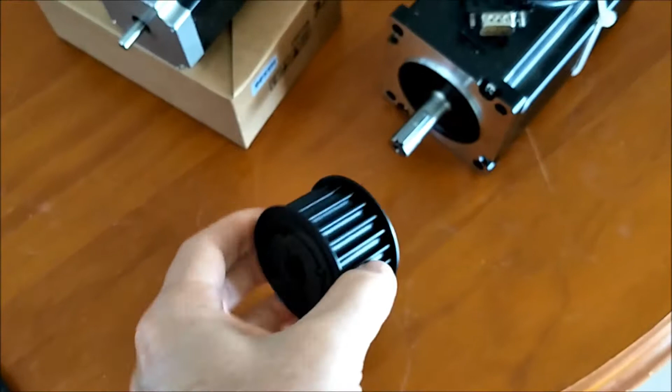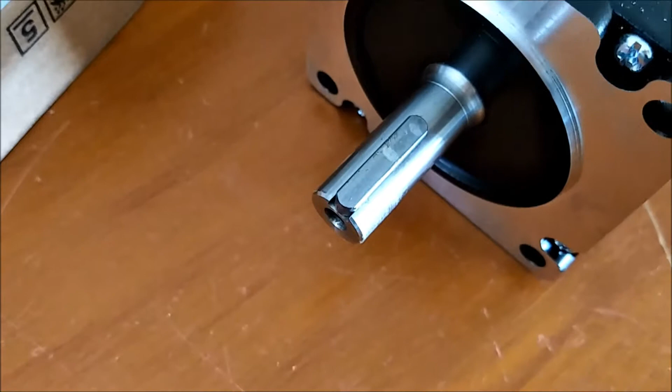Now to this pulley, which I was trying to work out whether I was going to put on that way or that way. The keyway, as you can see there, they supplied it with a key in the keyway. The key is obviously at the front of the shaft, so I'm thinking I'll probably put it in its conventional direction. If I can get that on there. Tap them on by hand.

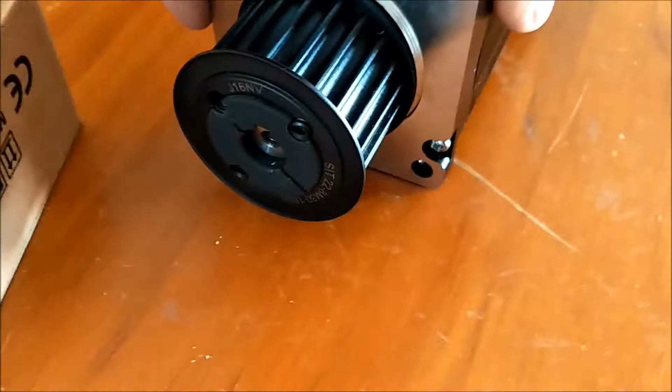And I've got, as I said yesterday, probably a couple of mil short. Probably 5 or so mil short there by the looks of things at the end. But there is plenty of grip on there. I think there was 23 millimeters I measured up yesterday, so probably about 18 mil worth of grip on that taper lock, which should be plenty considering there's not that much strain on this belt. And I'll put it on this way, so I'll lock that guy up.

Now there's two trains of thought in terms of how I'm going to mount this thing. I was thinking possibly I could make a U-shaped piece, one piece or two pieces, that would go around there and sit up this way, to then bolt to a back plate across this way. Or the other option we were throwing around was to CNC machine a plate out this shape, slide the plate in from the back side, which would be the preferable way of doing it, and then I could bolt through that plate here.

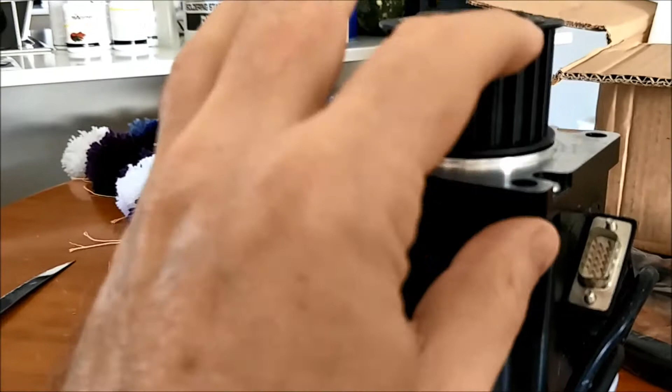The only problem with that is this guy right here. I don't really want to take it all apart, so that might make that idea a little bit harder. The other issue is that because the bolt holes are fairly close, I would have to machine this fairly tight to the motor in order to have enough material left to put a bolt hole through it and make it fairly strong. So although that was my preferred option, it may be out of the question.

I really don't want to be putting the plate on the front side, because that means I've got to pull this guy out even further. And that in turn is going to mean that even less is going to be sitting on this shaft on the end here. So I think I'm going to have to go with that original U shape and have the plate mount at this side of things, which means I'm going to have to go back through my drawing and redesign it all. So that's it for now.

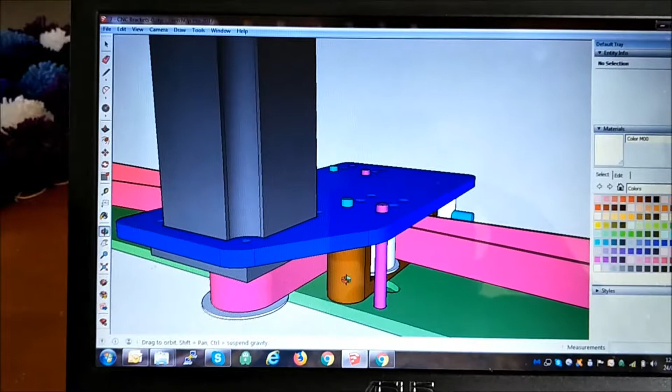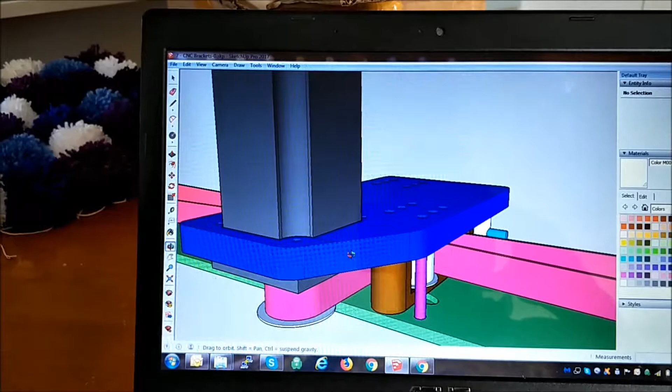Just had a little bit of an afterthought in terms of how to address this problem. If I was to make this blue plate a little bit thicker and then put some holes in the top side here, drill and tap the plate, I could just make this top piece removable, slide the motor in and then bolt it in place, and that might still allow me to retain this design.

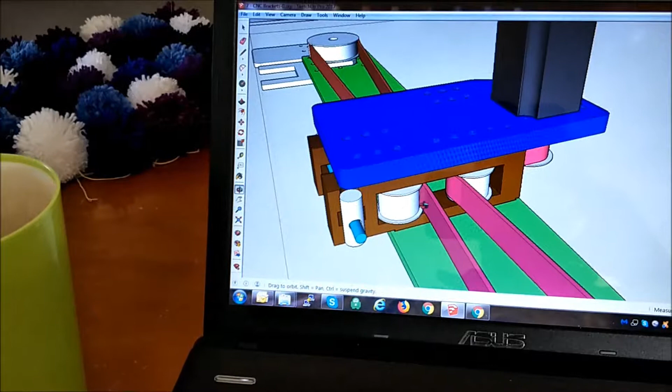While I'm here, I may as well flip this around and show you how the idler system's going to work. The idea is to have an idler either side of the motor, and then have another idler at the bottom here just to keep the slop out of the bottom belt. This one on this side will be fixed, and this side here will be adjustable, so they can pull in to tighten up the belt, and they're pulling towards each other, which means it's not pulling on any of the bolts that mount it. Okay, that's it.

Just got off the phone with a friend of mine who made a very clever suggestion, overlooking the obvious. He suggested that when I do the profile cut, I just profile cut around that little piece where the wires come out and slip it on that way. I will have a little bit of a cutout here where the motor is, but that doesn't make too great of a change because it will be bolted up with 4 bolts. 3 of the sides will be fairly flush up against it, and that looks like the simplest solution, so we're going to go with that.